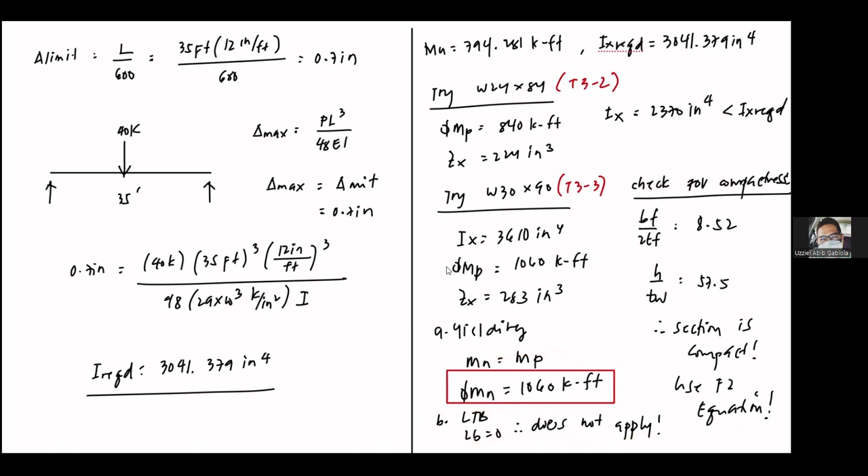So we use the F2 equation, and according to the F2 equation, we need to satisfy both yielding and LTB. Since LB is equal to 0, it does not apply to our example. So the capacity is based on yielding, which is equal to the moment plastic or plastic moment capacity of our section. Then it was checked with the three limit states, and as you can see, the highest value of performance ratio indicates that it is the controlling limit state of the design. Therefore, since all of these are satisfied, we use this section.

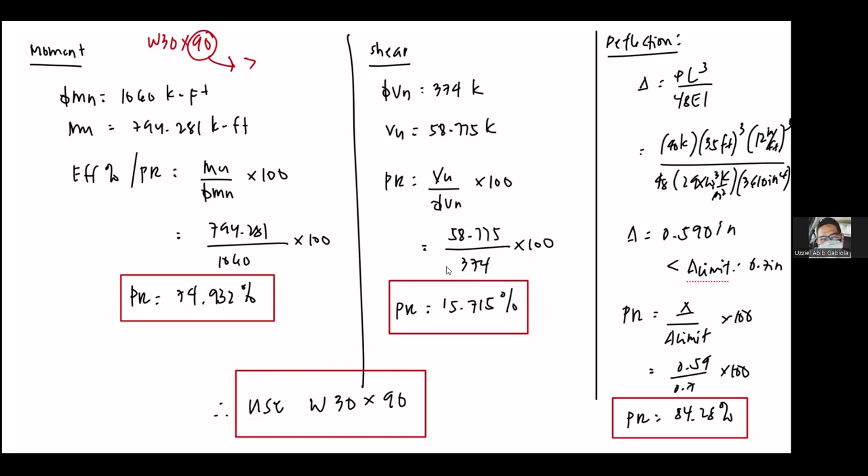Okay, now we move on to a discretely braced beam. So the difference is now LB will not be equal to 0. There will be a value of LB. And if we have a value for LB, we need to check which zone our calculation for the strength will fall for the lateral torsional buckling capacity. So here we discuss the procedure for discretely braced beam, and there will be some changes.

Number one, compute for the factored moment and associated CB value. Since there will be conditions where our beam has several bracing conditions, maybe at midspan or at certain points like quarter points, whatever is given, there is a CB indicated depending on the spacing of bracing. So if we have three different values of LB, we will have three different values of CB.

So again, we need to assume a value of the self weight. This is a requirement for this case, between 50 to 100 pound per foot. Then after that, we calculate for the moment, and then for CB based on our moment diagram.

And then we compute for the required IX based on the deflection limit. Again, if you do not have table 3-23, you can use the double integration method or area moment method to get the maximum deflection, and then just equate it to the limit to get the inertia.

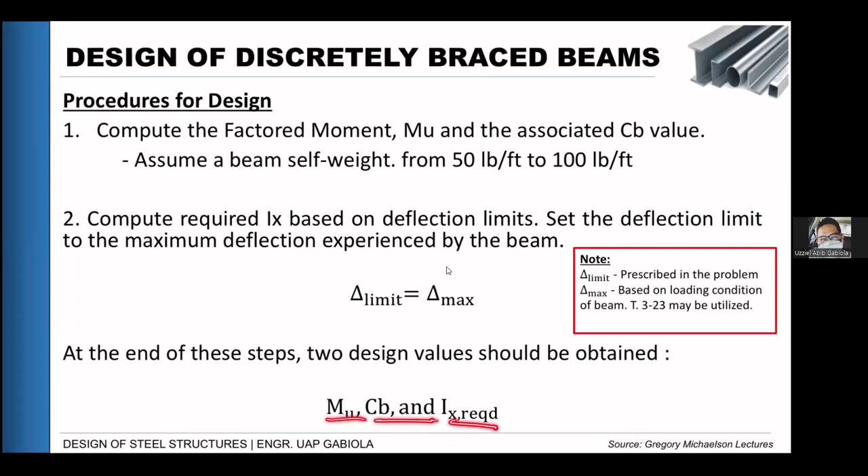Okay, so how to read this table? Let's say you now have the value of MU, CB, and IX required. To use table 3-10, you need to list out the value of your LB, your lateral torsional buckling length. Also, since this table is based on a CB value of 1.0, we need to normalize our calculated moment.

So we will divide our moment by the CB value that we got from the previous step so that we will have an adjusted value of moment. Because remember, the CB is used as a moment gradient multiplier for our capacity. So it means the listed moment capacities here are already multiplied by a CB factor of 1. So we need to normalize it back to 1, that's why we divide by CB. So whatever the value of the moment is here corresponds to the value we will find in the table.

Okay, so another thing for this table: the plot shows the total available strength for unbraced length LB. So the moment demand due to all applicable load combinations may not exceed the strength shown for LB, with CB taken as unity. So now what we do is we plot the LB.

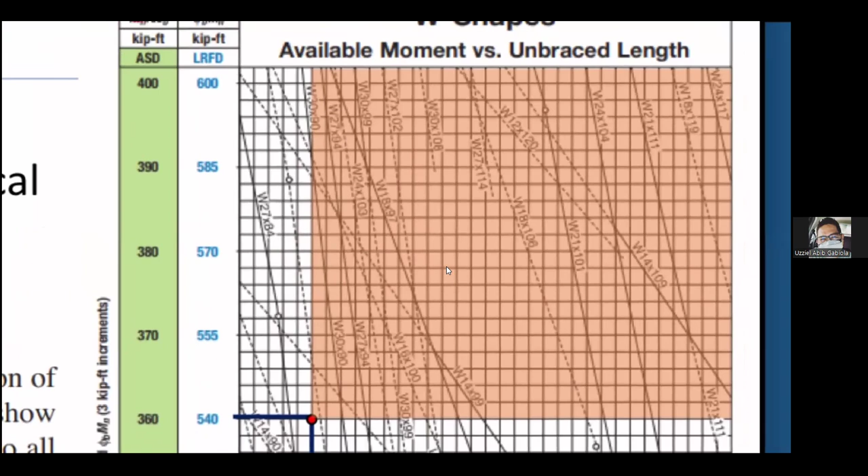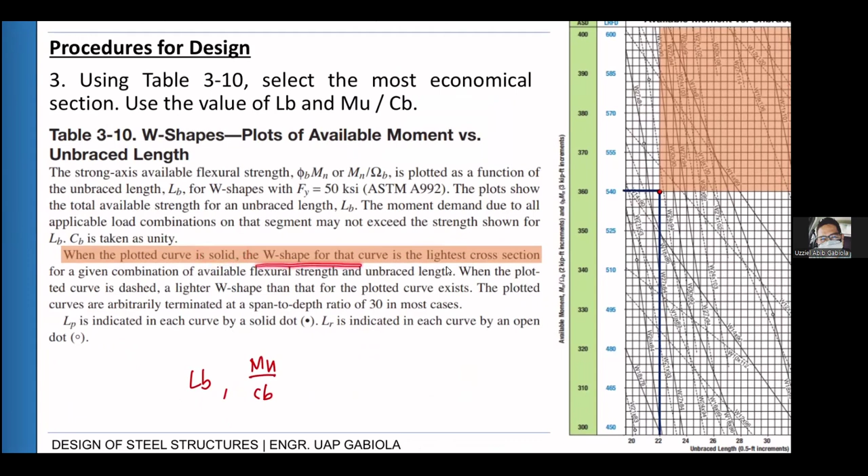So what does it mean? When the plotted curve is solid, the W shape for that curve is the lightest cross section. So we want to select from the shaded portion, because that's the portion that satisfies greater than our requirement for LB and capacity.

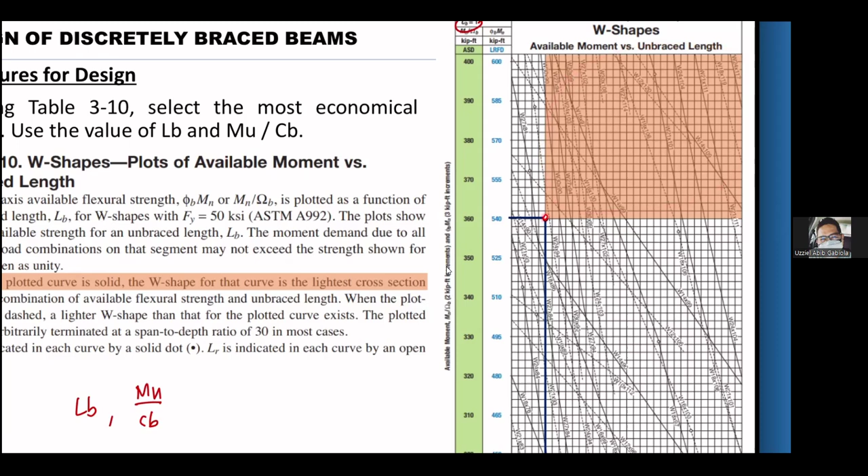So we'll pick a section here. First, we'll pick starting from the first solid line. As you can see here, the nearest solid line is W30 by 90. So that will be our first trial section.

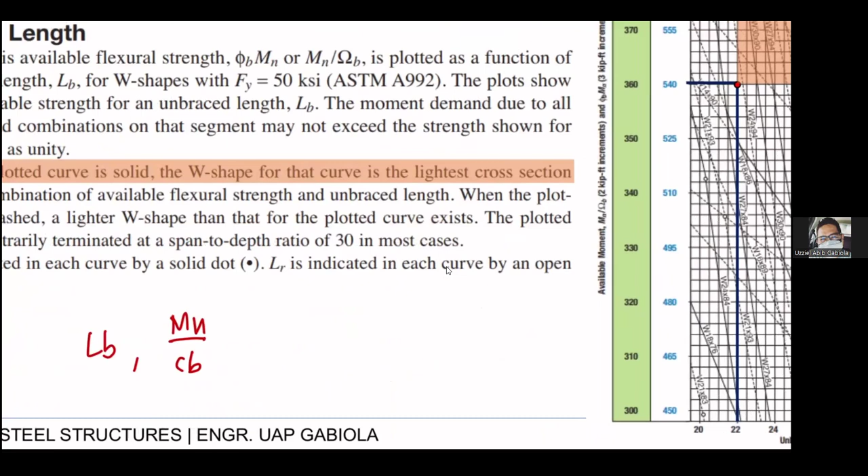When the plotted curve is dashed, a lighter W shape than that exists, so we only consider solid lines. The plotted curves are arbitrarily terminated at a span to depth ratio of 30 in most cases.

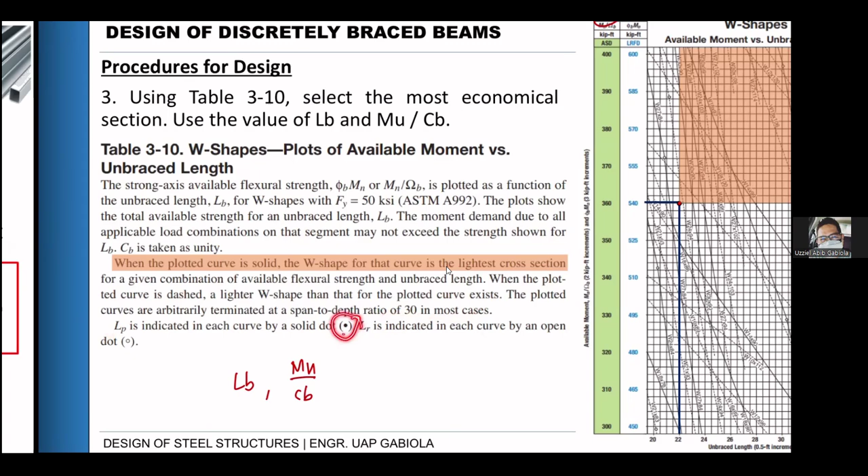After you selected a trial section nearest to your intersection, you check again its IX. If it's smaller, we refer to table 3-3, and we scrap the first assumption, then check for IX again. If satisfied already, skip this test.

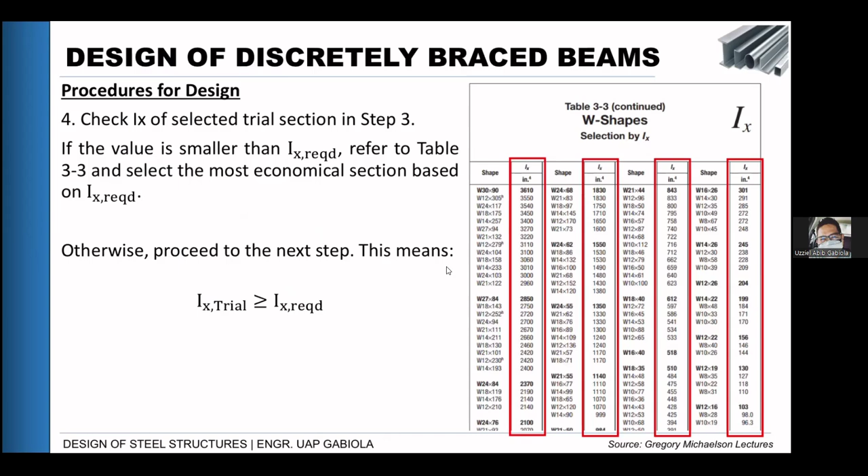Then again, check for the moment strengths, shear, and deflection. So the procedure is almost the same as the continuous braced beam, just a different design aid table.

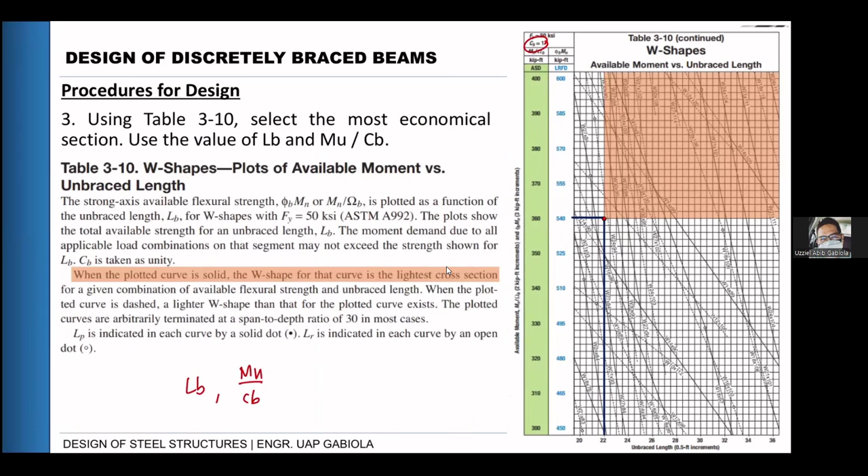Let's try an example. Since for LTB, depending on the value of our unbraced length, the capacity value changes, we have zonings now: zone 1, zone 2, and zone 3. Depending on which zone it falls under, that determines the formula for your MN.

Let's design the discretely braced beam shown. Bracing is provided only at the ends. So we see bracing only here. When you see that setup, the LB value is automatically 24 feet.

Assume the beam weighs 100 pounds per foot, and verify that it meets a live load deflection of L over 360.

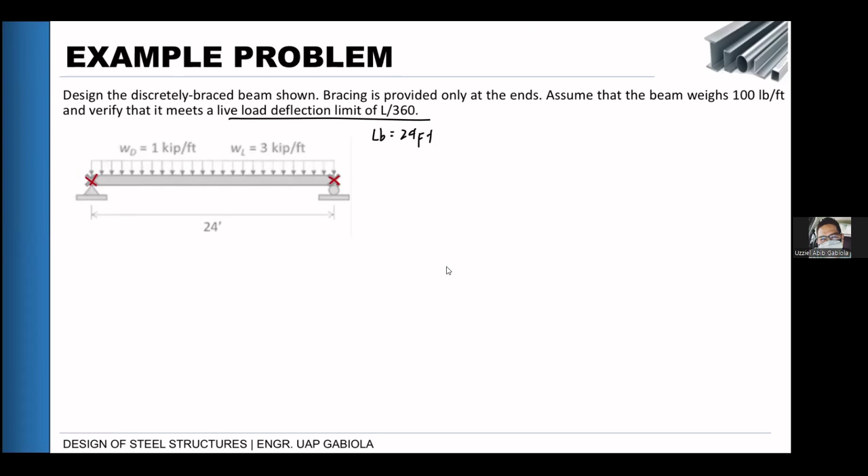So the first thing we need to do is get its moment capacity, and also the CB values. Let's simplify first.

Our self-weight is given, assumed to be 100 pounds per foot, so that equals 0.1 kip per foot. For our dead load, that will now be 1 kip per foot plus 0.1 kip per foot, so that's 1.1 kip per foot. If we want W, for WL that is 3 kip per foot.

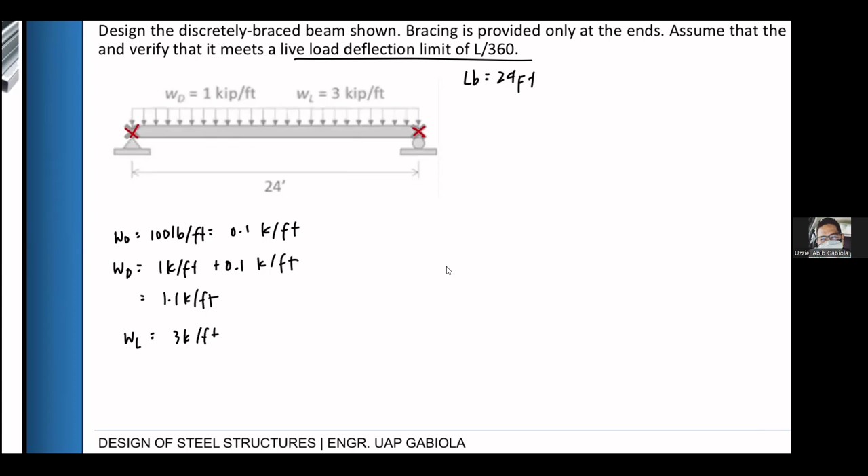If we want the ultimate load, that is 1.2 WD plus 1.6 WL. So that is 1.2 times 1.1 plus 1.6 times 3. WU equals 1.2 times 1.1 plus 1.6 times 3, that is 6.12 kips per foot.

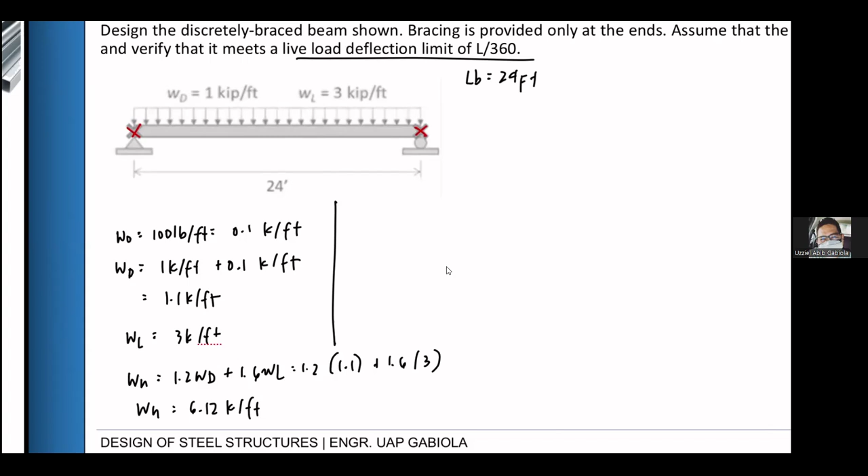In structural analysis, even without a moment diagram, you can get the value of the maximum shear and moment. But I will show the shear and moment diagram to illustrate the convenience of analyzing it that way.

So that's our loading. WU is 6.12. At the center, that times 24 gives us 146.88.

Since that is symmetrical, the two reactions will just support that equally: 73.44 and 73.44.

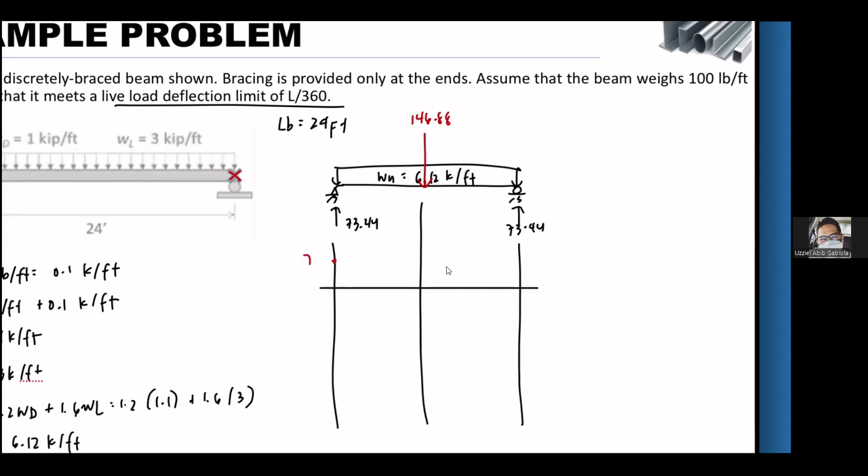So our shear moment diagram: for shear, this is 73.44. Then due to the uniformly distributed load, it will cross here to negative 73.44, then go up. So that's our shear diagram and our moment diagram.

The area of the triangle: 0.5 times 73.44 times 12, that is 440.64, then minus the area of the triangle which is of course 0. This is parabolic.

Or you can check it using our equation for maximum. VU is just WL over 2 if you use table 3-23. So that is the same, 6.12 times 24 over 2, VU equals 73.44 kips. For maximum moment, that is WL squared over 8, so that's 6.12 times 24 squared over 8, MU equals 440.64 kip-feet. So it's the same here.

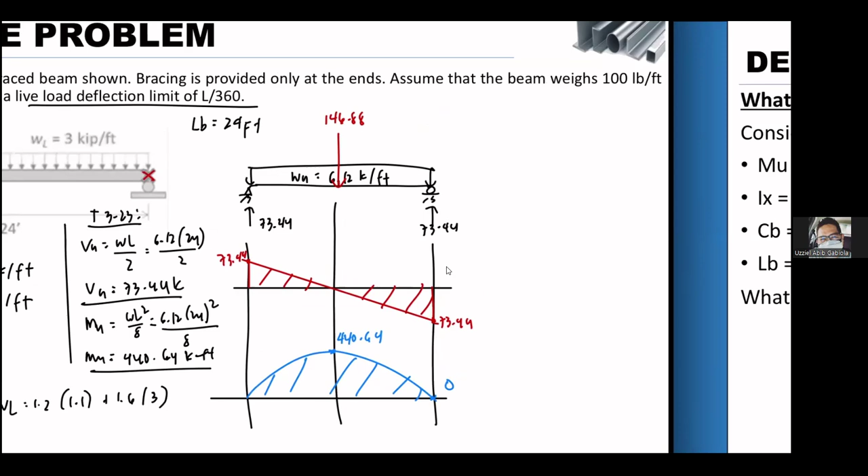So VU again is 73.44 kip. MU is 440.64 kip-feet.

Now for CB, it's based on the center to center distance of our bracing. So ito yung bracing natin. So ibig sabihin ng moment diagram natin pagkukunan is ito, and that is divide by 4. So this will be the location. So this is our MA, MB, and MC.

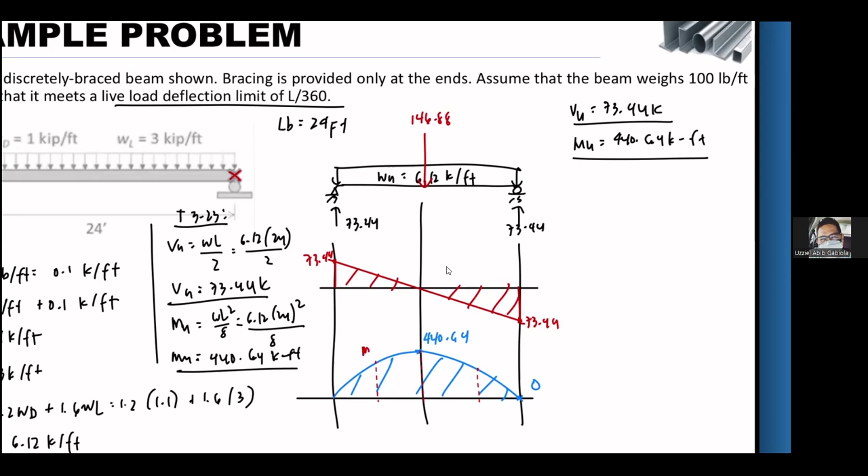So MA, MB - si MB and maximum moment will be the same. Pero how will you calculate that? Yung MA, MB, and MC. One way is siguro to cut a section. We can cut a section for convenience too. So pag kinat natin yung section, this will be our loading.

We have here 73.44. This is 6.12x. Then this will be 6.12x. So to calculate for the moment is equals to 73.44x minus 6.12x squared over 2. That is our moment equation.

So si MA, that is yung 1/4 ng 24, that is 6. Si MB is yung kalahati, that is 12. And then this is 18. Okay, so using this equation of moment, makukuha natin yung value ng MA, MB, and MC. MA, using X is equals to 6, yan tayong MB, X is equals to 12, MC, X is equals to 18.

73.44x minus 6.12x squared over 2. Calculate. Pag 6, ang value niya is 330.48. kip-feet. Pag 12, of course, that is 440.64 feet. Equals din siya sa maximum, no? And then for 18, that will be the same value of A.

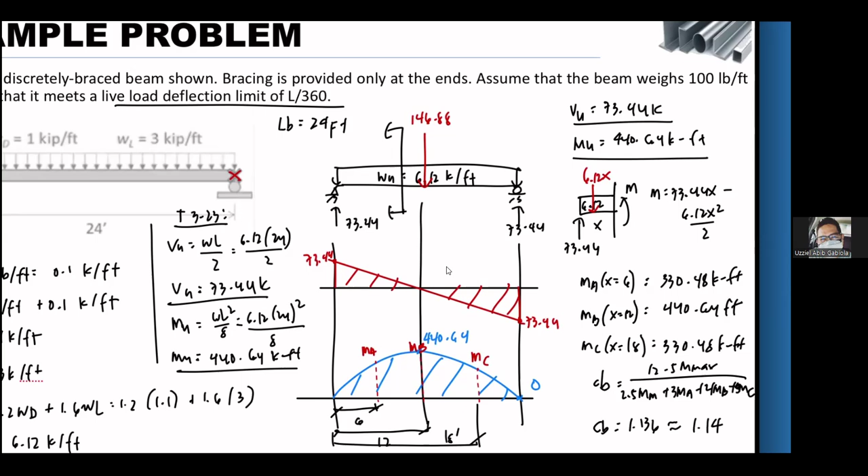That is 1.136, or roughly equals sa 1.14. That's our CB value. So ito pa lang yung step 1. We have our moment now and then our CB. Next is to calculate for the moment - now for the inertia rather.

Step 2 is for the limit. Limit natin is according to the problem, live load deflection of L over 360. So equals sa L over 360. So that is 24 feet, 12 inch per foot, over 360. Limit natin, 24 times 12 divide by 360, equals to 0.8 inch.

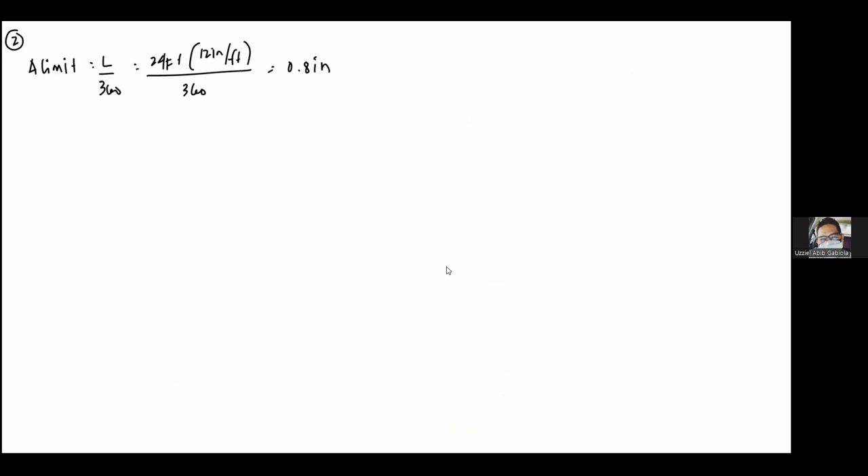And then for our maximum deflection, for a uniformly distributed load, ang formula po nun is 5 over 384, WL to the fourth over EI. That is taken from table 3-23. Check it out na lang. So sasat natin yung limit natin, yung max natin ay equal sa limit. So that is 0.8 inch.

So 5 over 384, W natin - W natin is for live load only pero unfactored. So 3 lang dapat yung gagamitin natin, 3 kip per feet. L natin is 24 feet to the fourth. So change natin yan sa 12 inch per foot to the fourth, over 29,000 kip per inches squared times Ix required.

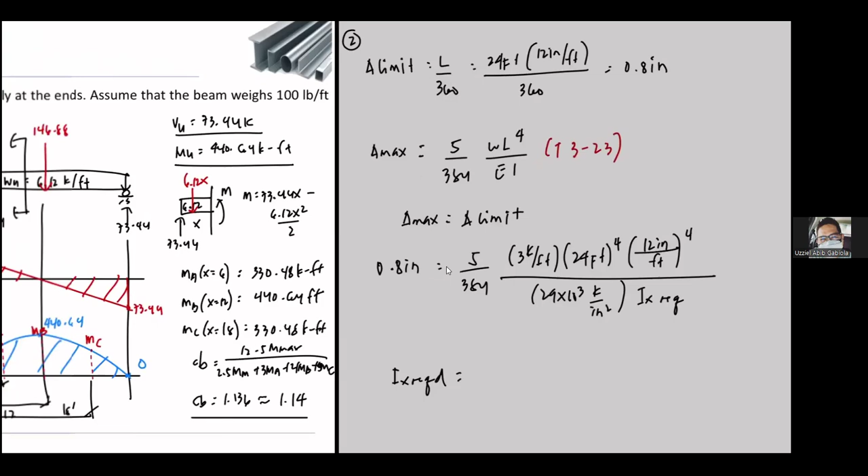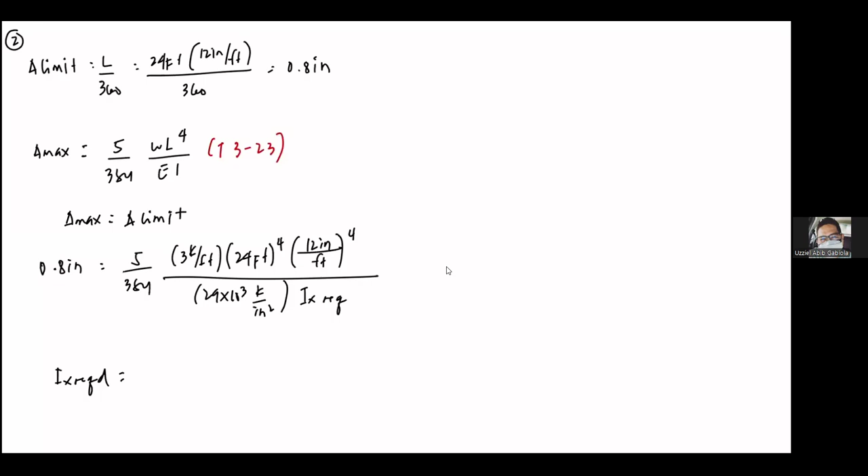Twenty-four. Okay, so I think there's a missing value here. So this is the conversion for this length. So we need to make yung kip per feet na inch din, ano? So 1 foot, 12 inch. Para mag-cancel to. Okay, cancel to dito, cancel to. May mga cancel na dalawa dito. So inch to the fourth yung matitira.

Okay, so that is 965.297 inch to the fourth.

Okay, so ngayon may value na tayo ng MU, which is 440.64 feet, CB of 1.14, Ix of 965.297 inch to the fourth. Then LB natin again is 24 feet.

Okay, so next step natin, step 3, using table 3-10. Ang kailangan natin is LB, 24 feet, tsaka MU over CB na value, which is 440.64 over 1.14. Need the value of 386.53 feet. Okay, 24 at 386.

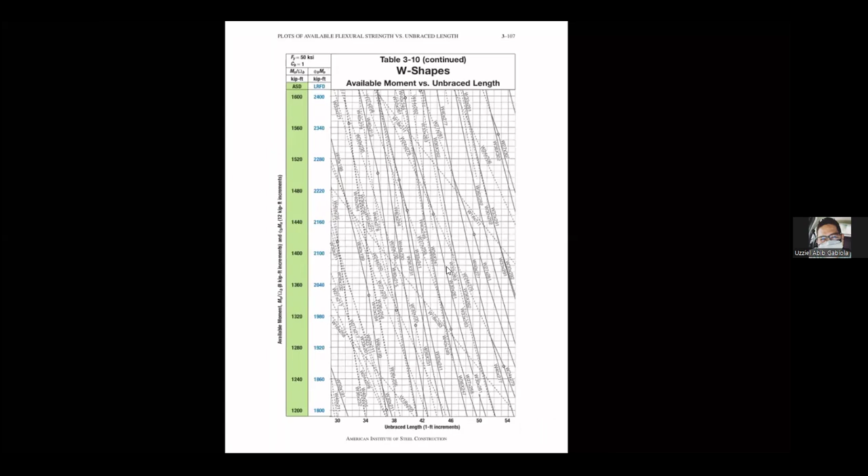So ito yung 3-10 na table. So madami po yan, so you just have to look for the unbraced length na kailangan nyo. So kailangan natin ng 24. So 24 is somewhere here. Pero makikita mo yung capacity niya medyo malalaki pa. So hanapin nyo yung table na medyo maliit yung capacity, kasi kailangan natin is 387 lang. So madami po itong table na to ha. Just have to be patient around it.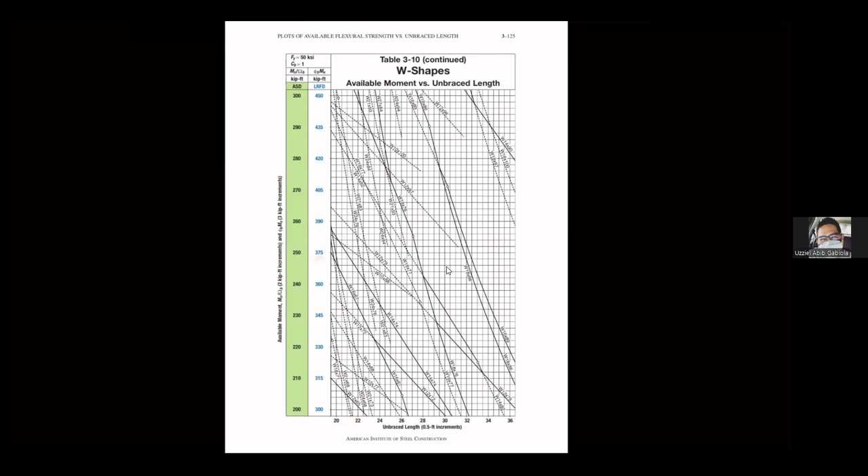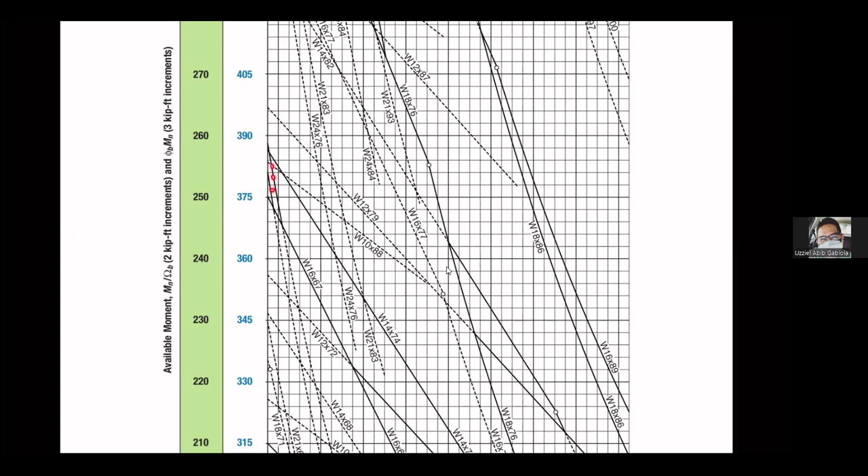Plot muna natin yung 386.5. May increment na 3 yung kada box. Kailangan natin ay 387. So 375, 78, 81, 84, 87. So somewhere dito yung 87. Lagyan natin ng mark.

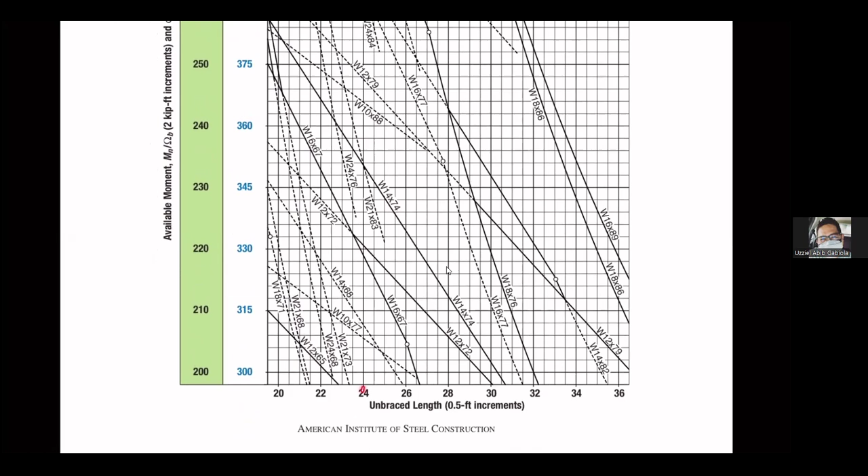Okay, somewhere dito. And then yung 24 feet is ito, no? Ayan, nandito yung 24, itong line na to. So just need to place that upward.

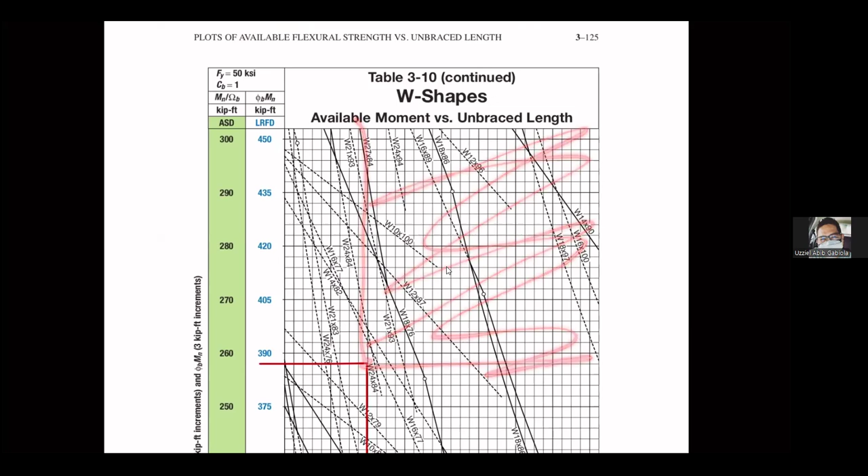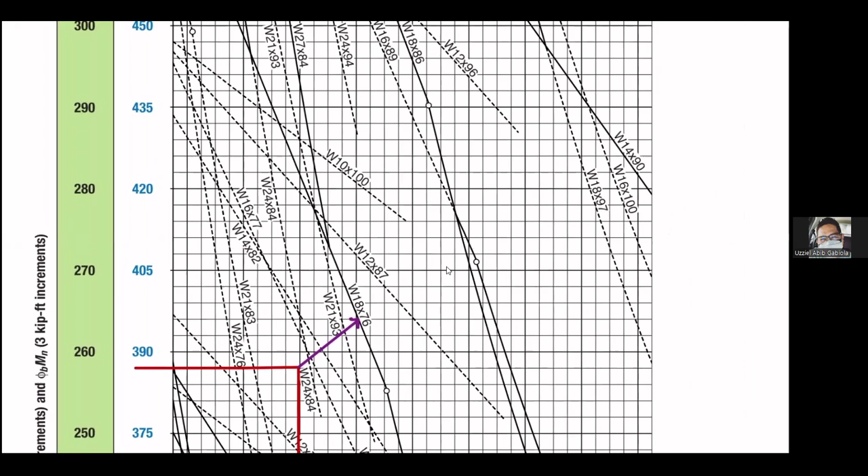Ibig sabihin, ang kailangan natin from this intersection is itong section na to, ito yung una magiging trial section natin, yung unang solid line. Looking at the curve, na pinakauna is ito, W18 by 76. Lagyan natin. Try.

W18/76. Ano yung kanyang property? Kukunin natin yung kanyang ΦMp galing dun sa table 3-2, yung Zx niya, tsaka yung kanyang inertia. 3-2, that is 18/76. 18, wala pa dito. 18/40, 18/50, 18/60, 18/71, 76. Ayun, si 18/76.

Pero according dun sa property, siya yung pinaka-economical based sa property ng table 3-10. So we have 611, sorry, 611, Zx is 163 inches cube, and ang Ix niya ay 1330, itong mga to ay galing sa table 3-2, inches to the fourth. So pagtitingnan natin, kailangan satisfy muna natin yung Ix. Ang Ix na required natin 965, this is 1330, so greater than siya dun sa required.

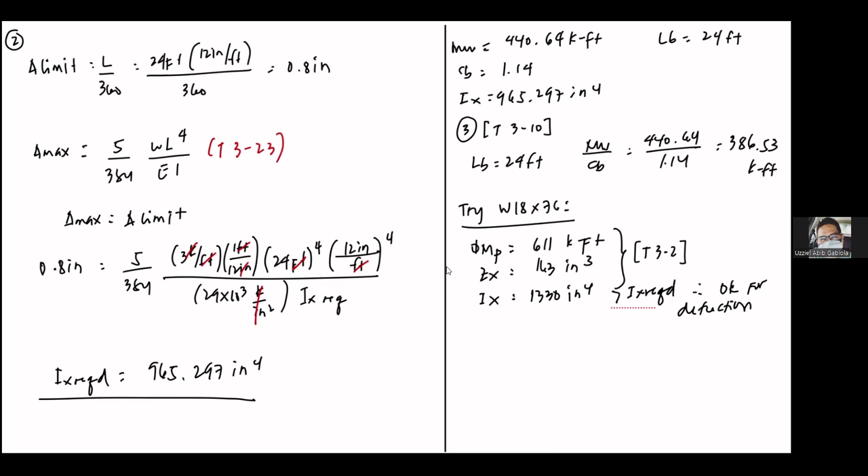So pwede nating okay siya for deflection. Pwede natin ngayon i-check si 18/76. Pwede tayong mag-proceed. So kapag meron tayo niyan, we need to verify again yung compactness niya.

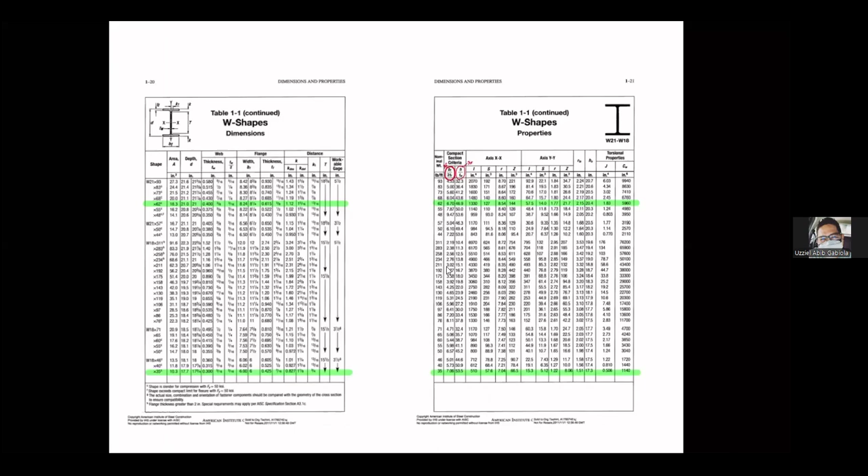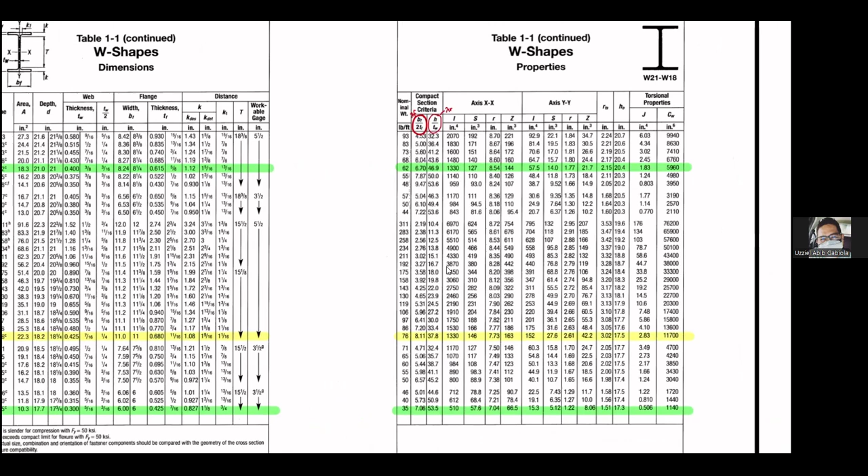Compactness: BF/2TF, and then H/TW. Punta tayo sa table 1-1, then we just need to check 18/76. Ito yun, that is 8.11 at 37.8. 8.11 tsaka 37.8, that is less than parehas, so nasa compact zone parehas. Therefore, section is compact.

Use F2 equation. So kung F2 equation tayo, we need to justify si yielding tsaka si LTB. Pero kailangan malaman kung anong zone muna tayo, so we need to check yung kanyang LP at LR niya with respect to our LB.

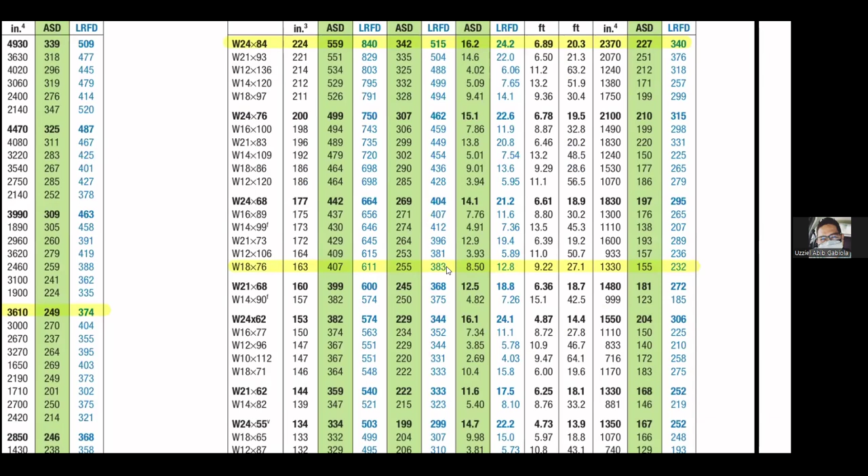Si LB, 24 feet nakalagay. Si LP and LR, makikita natin sa table 3-2. W18×76, ang value ng LP at LR niya is ito, 9.22 tsaka 27.1. So you can see LP is less than LB, less than sa LR, therefore siya ay zone 2.

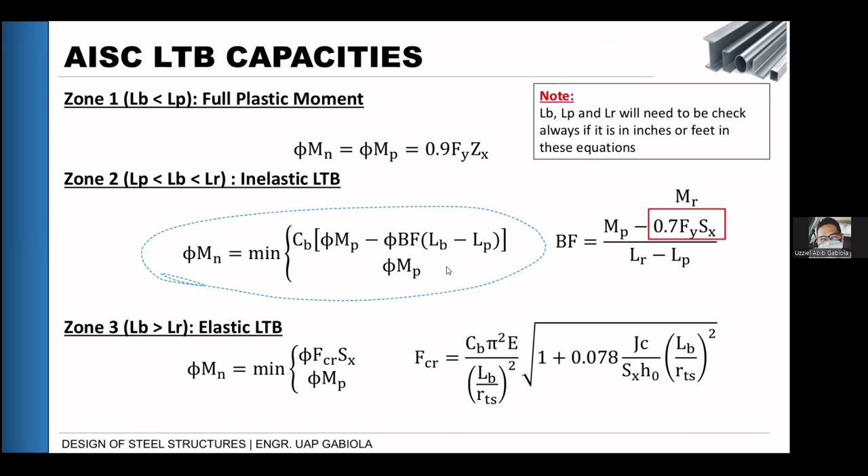Pag zone 2 siya, ang sabi ng code, ito yung kailangan natin i-satisfy. Ano natin yung equation? Pero again, since gamit natin is 50 KSI naman, meron po tayong values niyan dun sa table 3-2 natin.

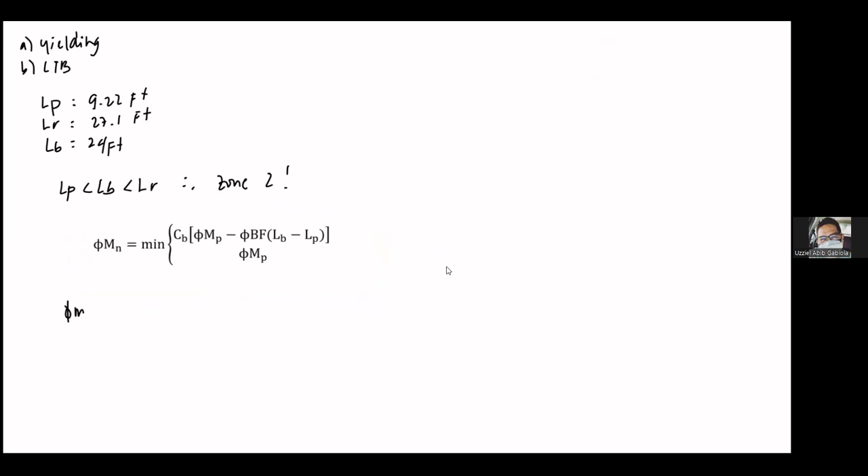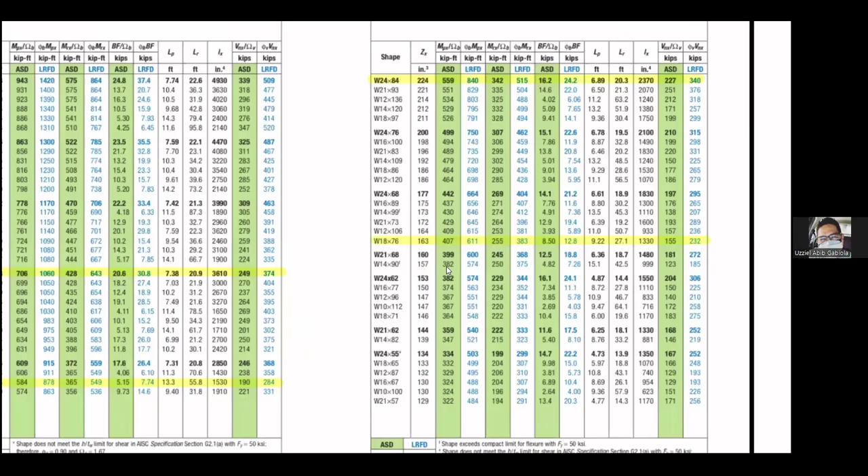Kailangan lang natin kunin si φMp, si φBF. Tayo doon sa table 3-2. φMp is 611, φBF 12.8, 611 kip-feet, tsaka yung kanyang φBF, 12.8. Kip. Using yung equation, minimum between CB natin is 1.14.

φMp is 611 minus 12.8 multiplied by LB 24 minus LP 9.22, equals sa 1.14 times 611, 12.8 times 24 minus 9.22, that is 480.870. Then yung MP natin is 611 kip-feet.

Yung φMn natin ay equal sa minimum, 480.87 kip-feet. Mas less than siya dun sa moment plastic natin. Comparing with our MU, which is 440.64 kip-feet, yung ating PR niyan, Mu over φMn, 440.64 divide 480.87 times 100, that is 91.634%.

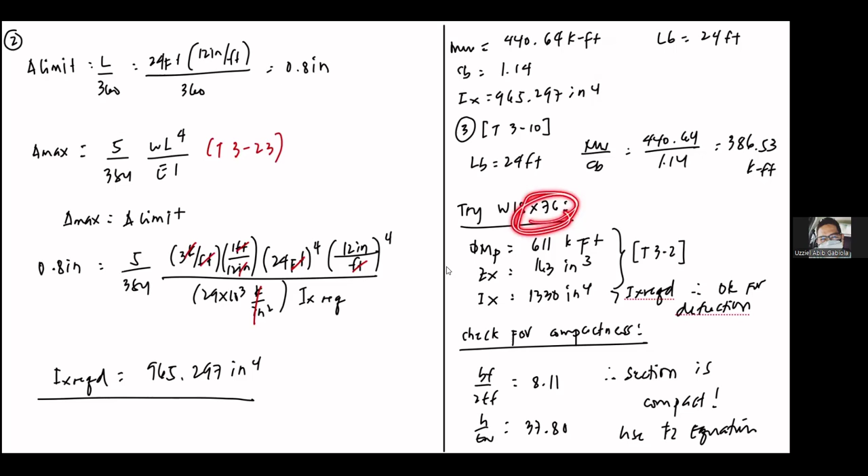Yung gamit natin na W18×76, ang ginamit natin mas magaan kaysa sa assumption natin kanina dito sa moment. So okay na yan, ibig sabihin mas sobra pa yung moment capacity ginamit natin, kahit di mo na i-recalculate yung MU.

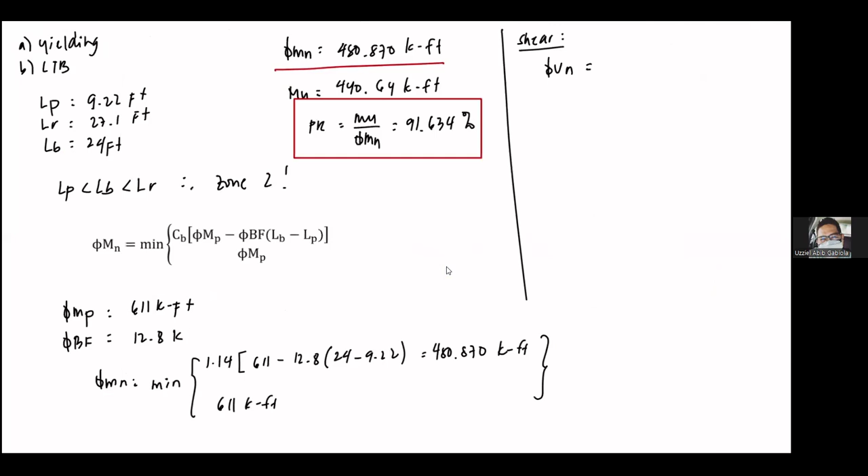Okay, how about for shear? For shear, φVn, makukuha natin sa table 3-2, that is 232 kips. So ang VU natin, based from the analysis, that is 73.44.

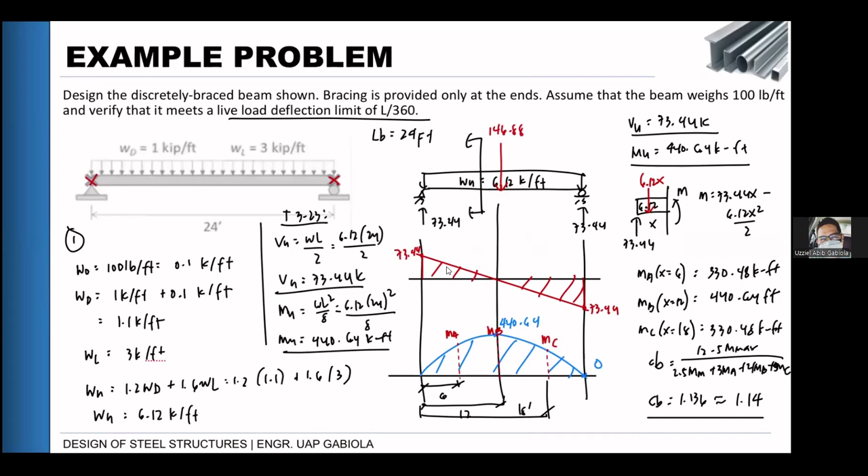73.44 kips. So ang ating PR, performance ratio, Vu over φVn, 73.44 divided by 232, that is 31.66%.

For deflection, that is 5 over 384, WL to the 4th over EI. 5 over 384 times 3 yung ating live load, and then we have here 24 feet, so ito multiply ng 1 over 12 to the 4th, over E which is 29,000, I niya is 1330.

So delta is 1 over 12, 24 is to 4, over 12, 384, 29,000, 1330. Delta is 0.581 inches, less than siya dun sa limit natin for deflection, which is 0.8. So PR is 0.581 over 0.8.

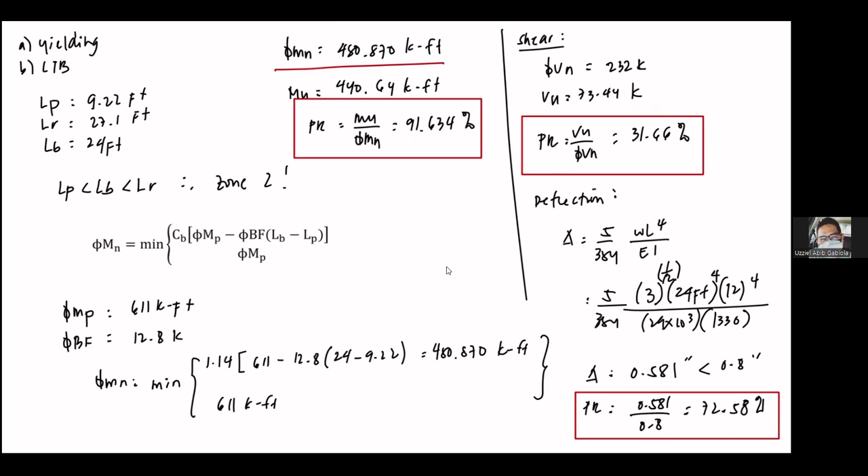72.58%. Looking at PR, ang ating governing or controlling capacity is yung moment. Since pasado naman siya lahat, use W18x76. Ano po yung pinaka-answer sa kanya?

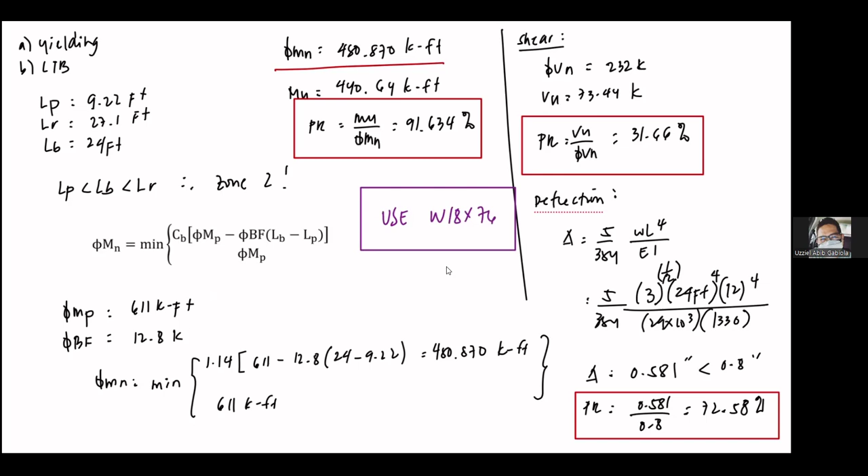So this is the design procedure for discretely braced beam. There will be another video, another example for the design of discretely braced beam, but I will highlight what if the value of the CB that we calculated is very high, what will happen with our moment. So check niyo yung next video for the next example. Thank you.